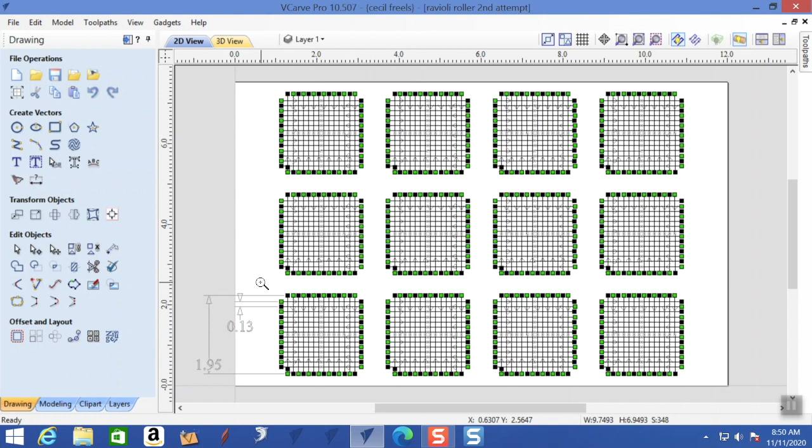So when I use a 1/4 inch bit, let me move over a little bit so you can see our dimensions. These lines are 1.95 inches long, and they're actually 0.125 apart. So I moved them apart equal to half the distance of the cutting tool. That gives me enough overlap so this will be nice and smooth in here, especially with the operation of cutting it in both directions.

It would be nice if I cut this one last because it's smoother, if I remember right from the first model. But we're not going to play with all that, we're just going to cut it like that.

So what I'm going to do is add this X, and that'll show you in some ways how I did the rest of it. If you know how to draw a line, all you do is draw a line from here to here, offset it, and then use your edit tool, object edits, to change direction, and then do an array where you copy these two and offset it 0.25, which takes this and moves it up here and copies it.

And then you make, let's see, 1, 2, 3, 4, 5, 6 copies, so your rows are going to be 7 rows. The distance from here to here is 0.25, so it's a 1/4 inch from here to here.

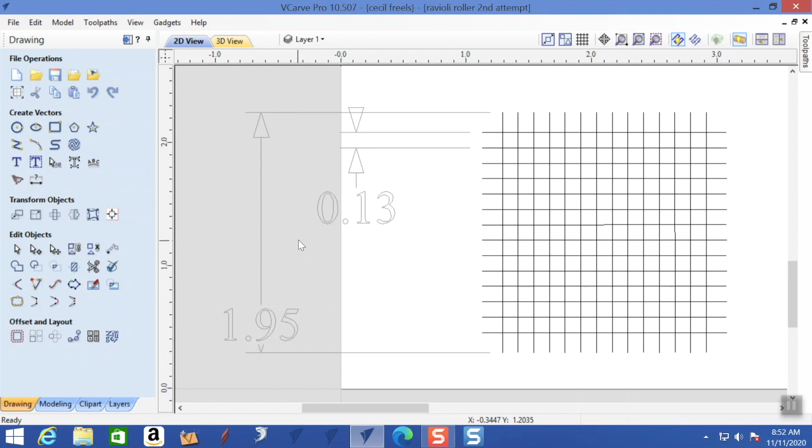That's why I said I'm not sure what's going to happen in this corner. So what I'm going to do is show you how to do a corner that will work in case we need it. To do that, I'm going to draw a line from here out here. Push my space bar, draw another line from here out here. Push my space bar. And what that's doing is giving me a line.

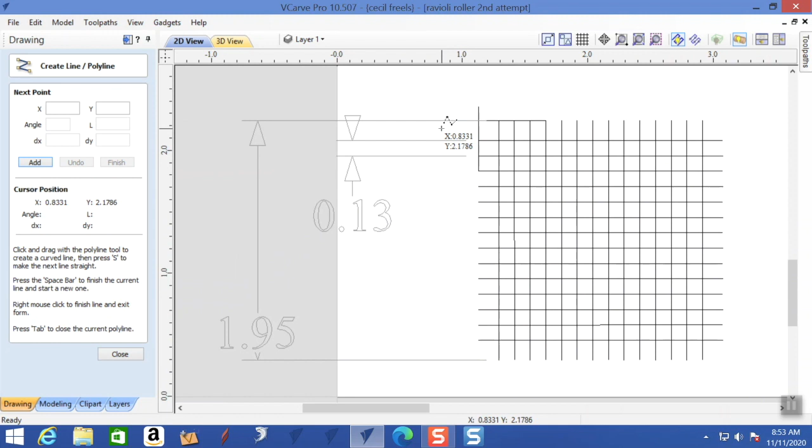Let me get rid of my dimensions first, so they're not in the way. So I'll delete those. See my line right there? Because I'm going to draw a line from here to here. Now, so I can do that again.

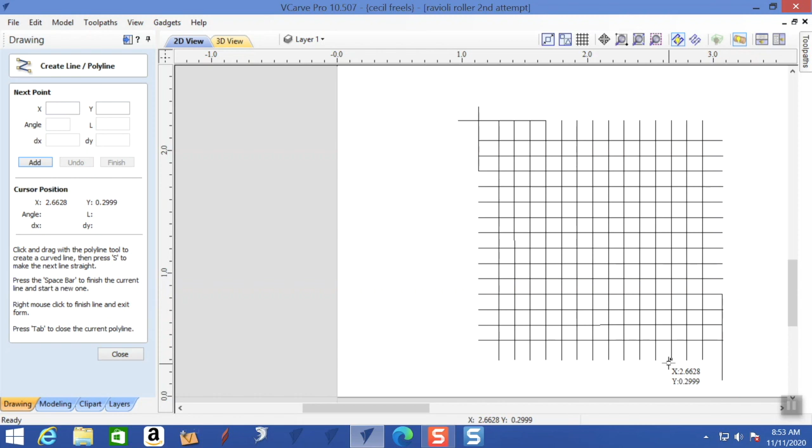I'll go back to my line tool, and I'll draw a line here, pick up here someplace, and press S so it's straight, space bar, here to here, space bar. I'm going to draw a line from this intersection to this intersection, space bar. Now if you look at that line, let's close the line tool.

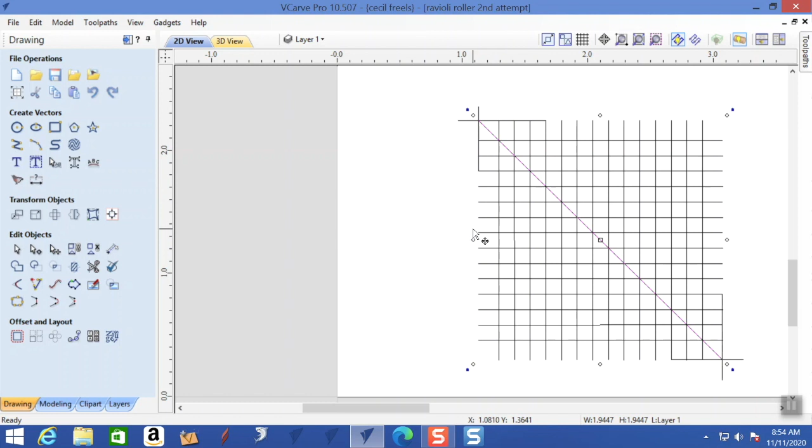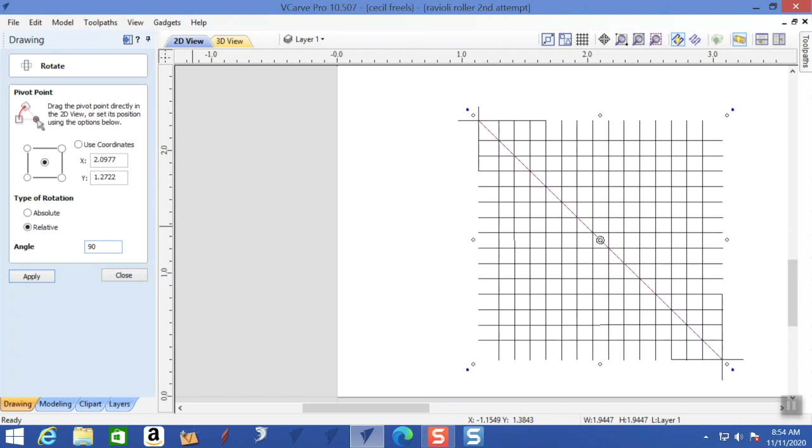I'm going to need another one over here, from here to here. Well, I should be able to rotate that line. First I'll copy it, so I'll select it, do Control C, Control V, so there's a copy. Now if I don't touch this, the only thing highlighted is the copy, so I can take this and rotate that copy around the center, 90 degrees. Apply. Now I have two lines that go from corner to corner.

Alright, now I'm going to select both lines and array them. Now if you look at what I showed you before, there's 3 rows and 4 columns, and the space between those, between X is 2.6 and Y is 2.5.

And that's the ravioli roller that we saw before, and I figured that out. What I did was simply make squares that were reasonably spaced and then offset it for the tool spacing and then plop them in there. So you can calculate all that or change it any way you want, because ravioli sizes go anywhere from 7/8 of an inch all the way up to 3 inches. I just picked one in between that would fit on a 2.5 inch roller. So that's how I came to those numbers.

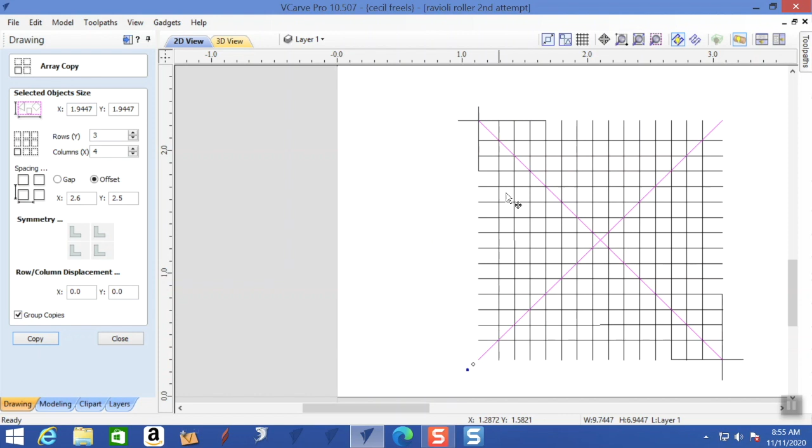Now if I copy this, it's going to group them, and I wanted to group them. So I'm going to say copy, and then I'm going to zoom out so you can see what's happened. See, that's in every one of the ravioli pockets, and that's what I want.

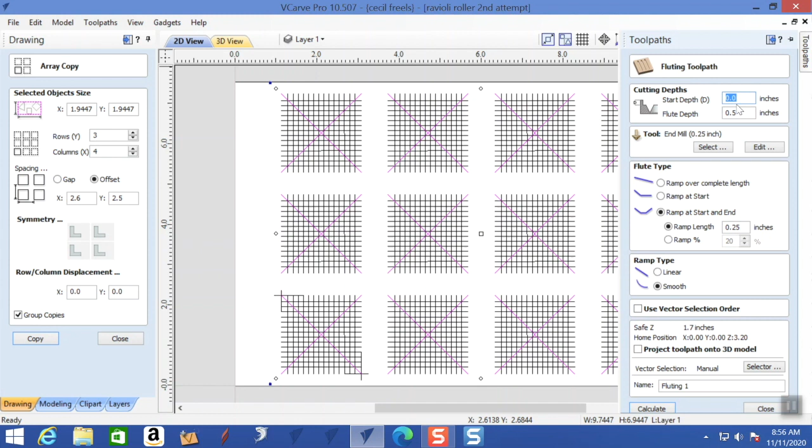So then I'm going to make a tool path, and the tool path is a fluted tool path, just like the other cut. My start depth is 0, my flute depth is 0.5, and I'm using a 1/4 inch tool.

If you hit edit, you can actually see the feeds and speeds that I use. My pass depth is 0.125, which is half the distance of the cutter. My step over is 0.125, which is 50%. And my speed is 80.

Keep in mind these two speeds you can actually slow down on your touchpad. You just slide that speed slide down a little bit. I usually start at 50% and go from there.

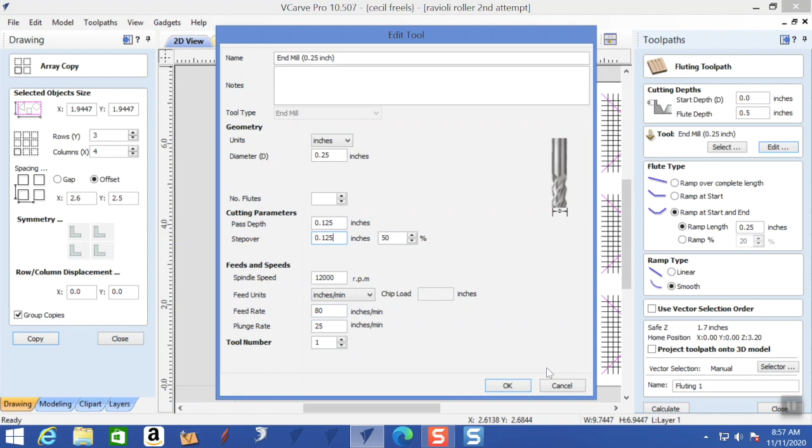Keep in mind, the first cut on each one of these is 100%, so it takes a plunge depth and then it cuts at 0.25 all the way across. I wish the software would compensate for that, so the first cut, whichever one it is, would be 50% speed. That way it takes that huge cut first and then it overlaps and overlaps. But they don't do that. Maybe in the future they will.

Let's hope so. Now let's go back to here. What I'm going to do is a ramp cut at both ends, so it'll start here, ramp down, and go across.

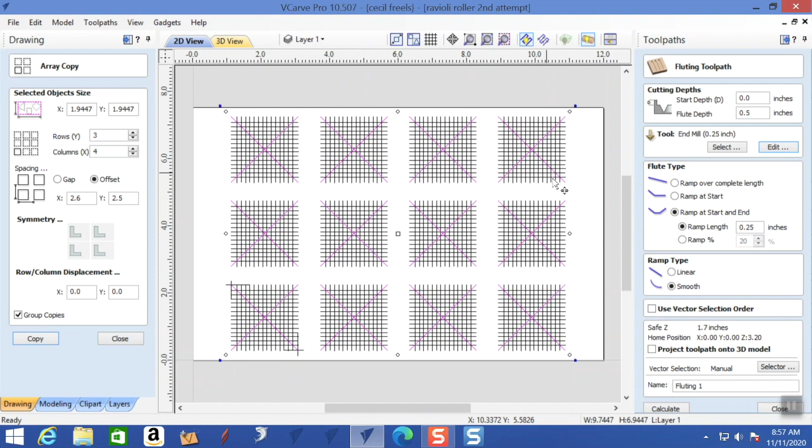Now the ramp cut that I use, if you look here, is 0.25. But if we zoom into this, the distance from there to here is a little bit longer than 0.25. So what I'm going to do is change that to 0.3.

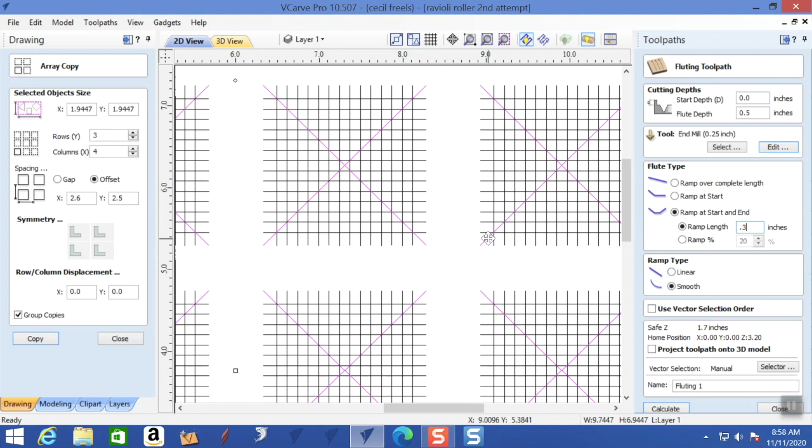I could extrapolate this by measuring the distance from there to there, because I know this distance from here to here is 0.25, and if you look at it, you can see it. We can calculate that.

But for our presentation, I'm going to use that. And I want a smooth transition. I want it to kind of roll down, because that's the way the dough is going to do it. It's going to roll down in here versus a straight linear ramp.

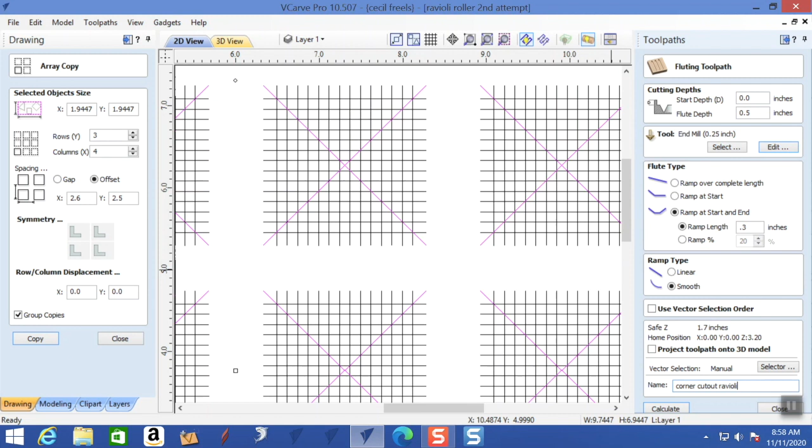And then we need to give it a name, and I'm going to call it corner cutout. Ravioli. Right? And then we're going to calculate that.

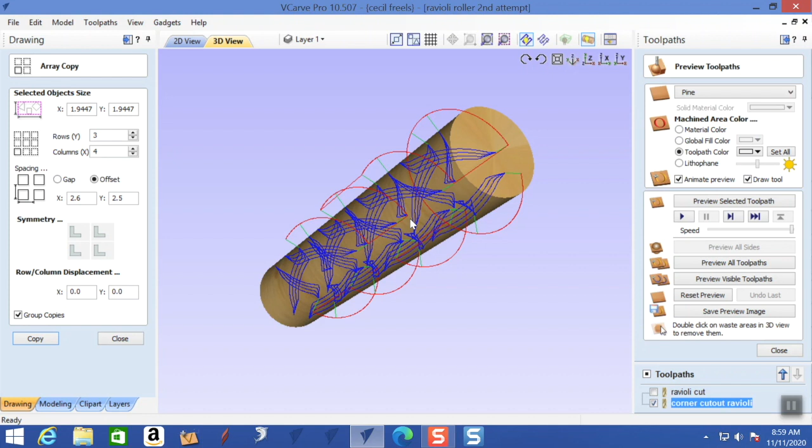You see it shows just that, which is kind of cool. Aren't those weird looking? If you look at it, come around here, you can see it's actually going down 1, 2, 3 passes to get to the depth. That's 4 passes, which makes sense, because it only cuts 0.125 each time, and we're going down to 0.5.

So let's take a look at it. We'll preview just that, and it should give us an X cut in there. See it? As I roll this, you see it has to reset each time I roll.

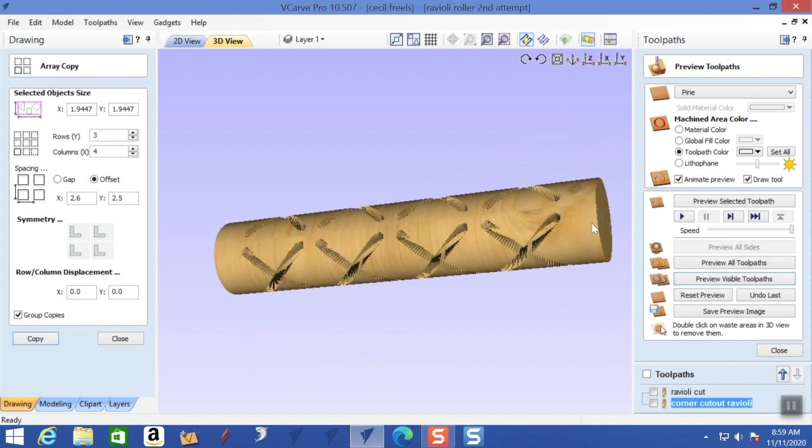So that's the cleanup, corner cleanup that we might install based on how the roller turns out first time. Let's preview all the toolpaths so you can see the roller. It's cutting those, cleans out the corners.

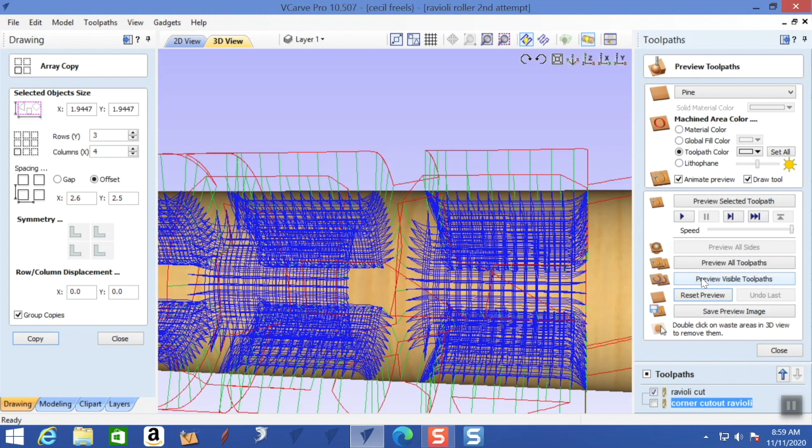There it is. I'll zoom in, click on it, zoom on. You can see that the corner does look dished out. So if we run just this one and reset it, see what the corner looks like. Okay, see that? That's what I'm trying to get rid of, that straight part right there.

So I probably will run it separately. So if you have any questions, let me know.

You've already seen the first video of this cutting. What I'm going to do is do another video of cutting out this one so you can see the difference in the toolpath. I did that toolpath change to try to save some time.

Let's take a look at the estimate here. It says 1.34 hours. The other one took almost 4 hours because it moved up and down, up and down, up and down, and your plunge depth is quite slow, it's at 25. So that slowed it down quite a bit.

I see that corner. What I'm going to do now is click on this one and run it and see how it cleans out the corner. See how the corner is cleaned out now? And that was the purpose.

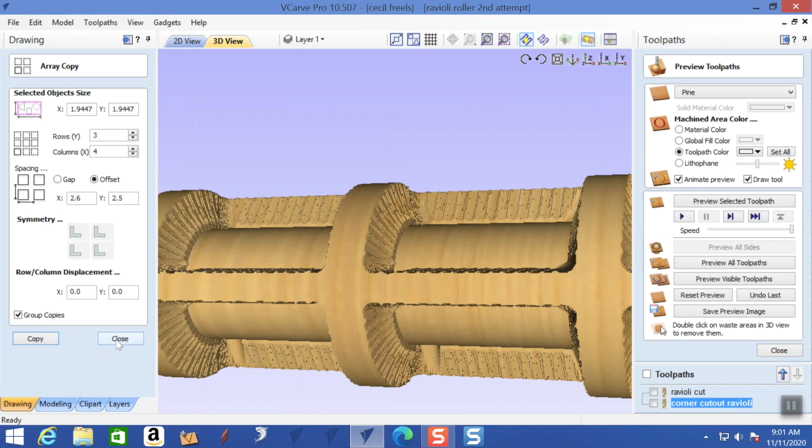If you need me to run through the entire project of building it, leave me a note and let me know, and I will do that for you. I'll create part 3 of the Ravioli cutter, and actually go through in detail making each individual pocket. But I've given you all the measurements so you can actually do that yourself.